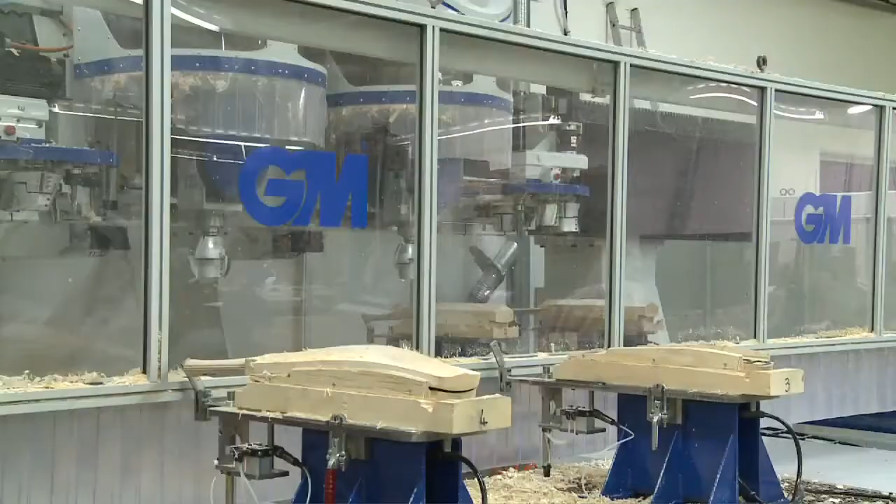Right then, Swanee, let's show you how we turn a cleft into a cricket bat. The first process is to cut the face on a state-of-the-art CNC machine. Dave's fixing the clefts onto the jigs in the right place. This CNC was designed by Gunn & Moore and uses computer-aided design, enabling us to make the most consistent, high-quality bats in the world.

So we've just seen the first process on the CNC, and the result of that is we've got a cleft that's got the profile of the face, but also it's got the bow shaped in. Oh, yeah, you can see that. So now that's the correct width for a man's bat, the correct length for a man's bat. It's got the profile of the face and also the bow of a man's bat. So that's now ready to go and be pressed.

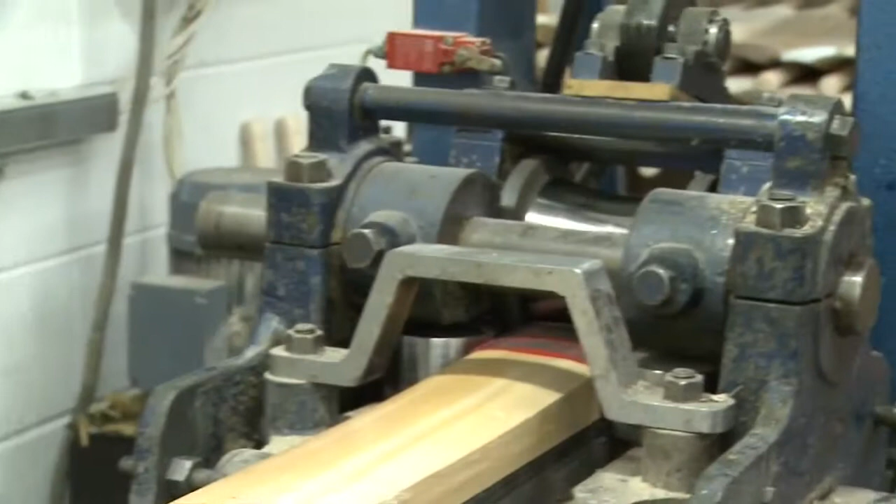So the next stage is pressing the blade, so it increases the hardness of the face so you don't get any ball damage. So after we machine the face on the CNC, every blade comes and gets pressed. Now what this is doing is it's compressing the surface, generally between 3 and 5 mil that the surface goes down, and what that does is it hardens the surface up so that it can withstand ball impact and doesn't damage the bat when you actually use it in a cricket match.

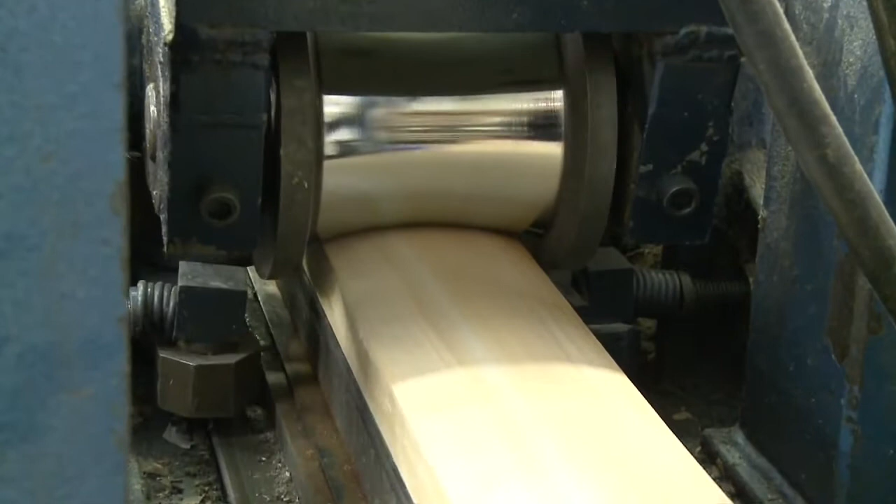So it'll have 4 passes on this hydraulic press, and after each press, the pressure goes up, so it gradually compresses the surface. The roller shape here is a perfect match to the face, so that we ensure that there's a uniform press across the face and also all the way up the blade.

So the first stage of the handle fit is to V-cut the handle. So after we cut the V in the handle, we mirror that cut in the blade so that the handle will fit nicely into the cleft.

Mark's just checking the fit of the handle because obviously it's machine sawn. Every handle needs hand fitting, so he'll see if it's too big or too small. The first thing that he needs to do is clean off the tabs on each side. And then what he's doing there is actually chiseling the set of the handle. He'll then offer it back up to the blade and recheck. He's obviously not happy, so he's going to chisel a little bit more off.

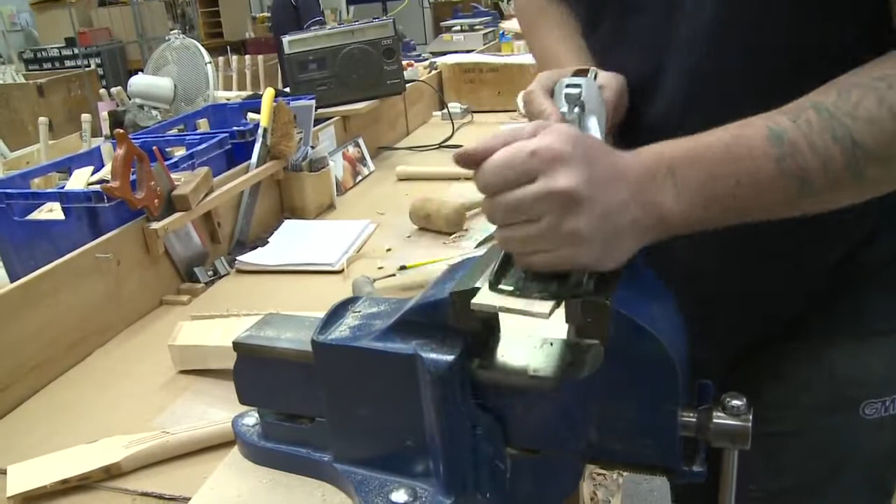So each Gunn & Moore handle's hand fitted by a master craftsman. So again, still not happy, so it goes back in, chisel a little bit more off. So Mark's happy with the fit, and what he's doing now is actually putting the set in the handle. Just checking that. He's obviously happy, so now he's going to pull the handle off.

And then he'll fit the handle back in, making sure that the handle and the blade are flush, and that means that the set that Mark put in it is the same. So once he's happy with that, that's obviously good. He'll clamp that up. And then they'll be kept in those clamps for 24 hours for the PVA glue to dry.

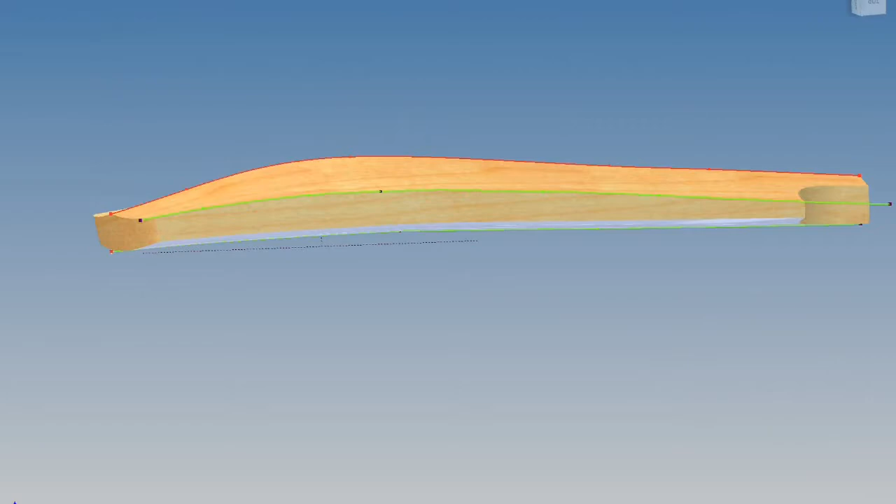The bat then goes back onto the CNC where the computer designs really come into their own. So this is the CAM, or the computer aided machining software. The CAM software generates these yellow lines, which are the tool paths, which the machine uses to cut the piece of wood. The model that you see there is the exact thing that the machine's going to cut.

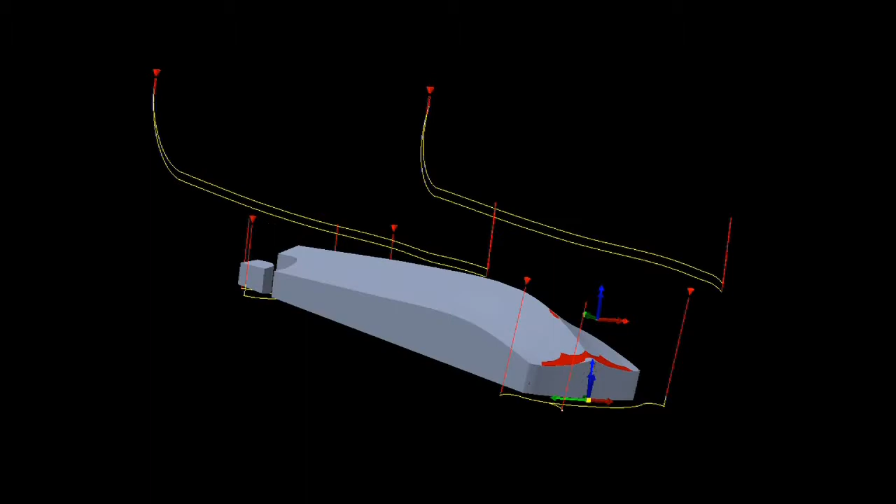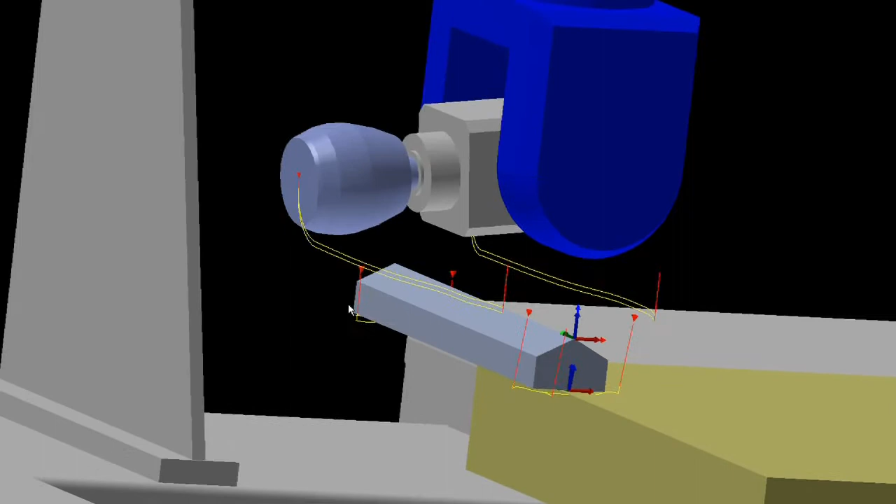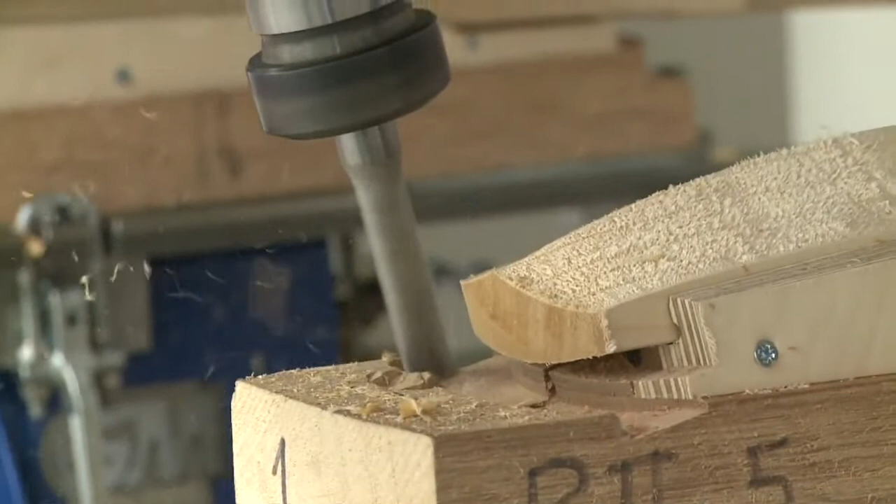So this is the finished bat. You can see that it's had its back cut. The pineapple that you saw scooped out the profile. With the scoop, it means that you get a big swell, but with less weight because you've got less wood in there. Okay. And it cut the toe, so it's the right length, the correct length. The shoulder's been cut. Only rough finished. You'll see Kev later finish them by hand, and then they'll get sanded. But that's the bat off the machine.

It's now looking like a real bat, isn't it? Yeah, it's not far off at all. Every bat that comes off the machine for that profile is exactly the same. So if you buy a bat today and next year you want the same bat, you can go into the shop and buy the same bat with no problem. This will be exactly the same shape. Very clever machine.